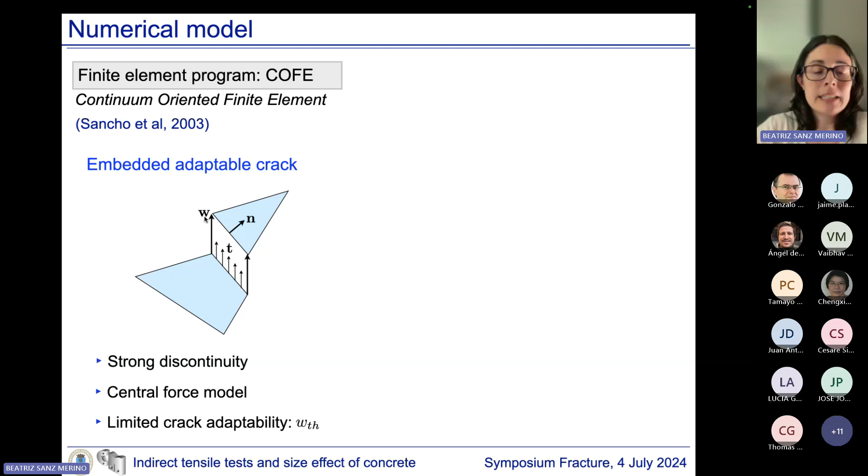It follows the central force model. It means that the traction vector and the displacement vector are parallel, and there is limited crack adaptability. It means that in the finite element program, the crack orientation is allowed to change until a threshold value WTH of the crack width is reached.

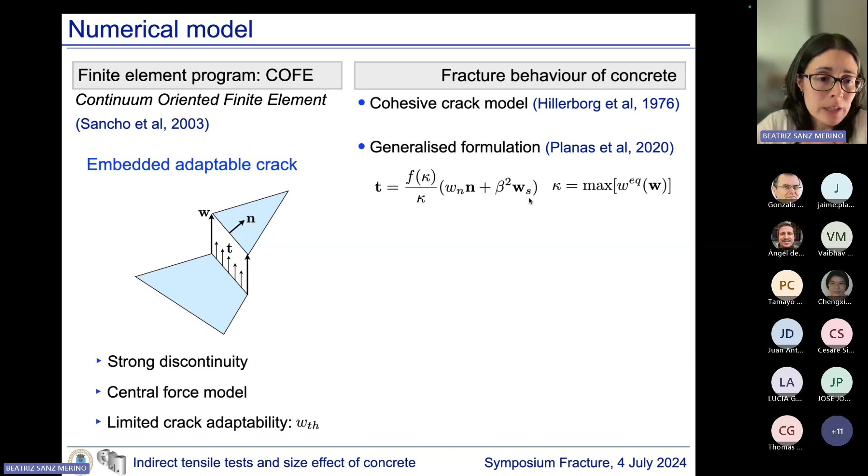For the fracture behavior of concrete in these simulations, we follow the cohesive crack model introduced by Hillerborg in 1976, as already explained, and a recent generalized formulation by Planas and collaborators was applied, in which indeed the traction vector can be modified and not be parallel to the displacement vector, but it was implemented just for comparison with other methods found in the literature. But for our simulations, we follow the central force model and values for beta equal to 1.

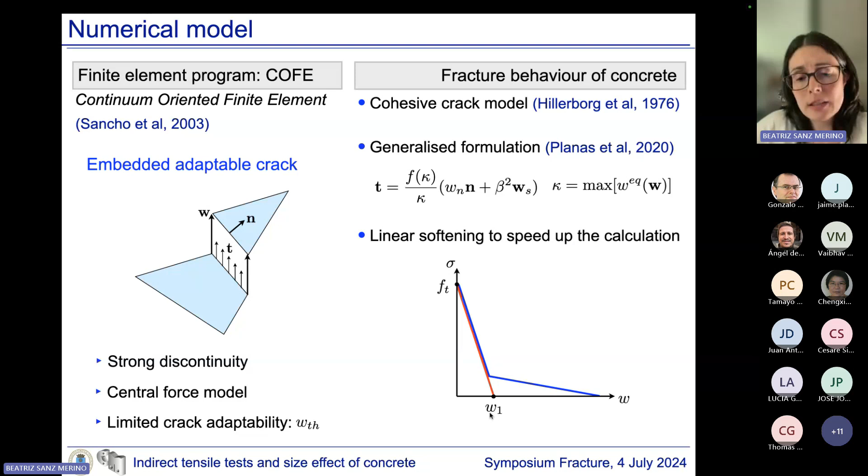In the calculations, just linear softening was taken into account to speed up the calculation, and because in the study we are just focusing on the maximum of the Brazilian test, and it is supposed to happen for crack openings smaller than W1. So these are the parameters in the simulations.

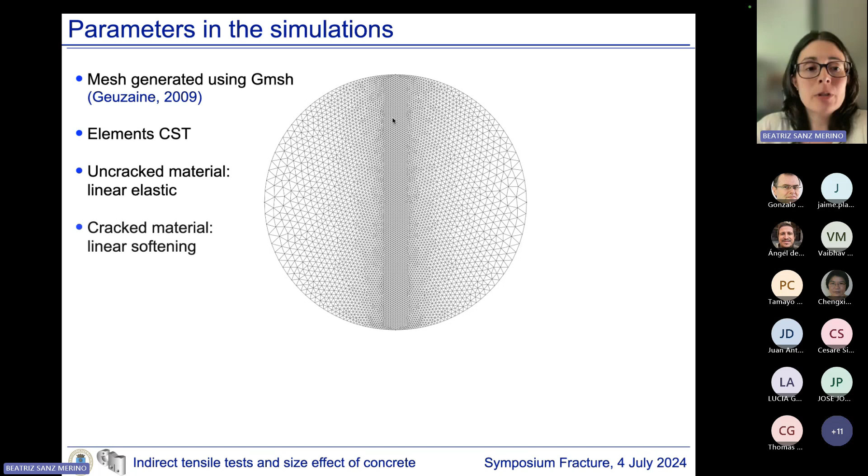The mesh is generated using the Gmsh program. You can see that here in all the domain we have elements which are constant strain triangles, all of them crackable elements. So the crack doesn't have a prefixed path, at least in this step. So the crack can appear wherever. For the uncracked material, we assume linear elastic behavior, and for the cracked material, the linear softening I mentioned.

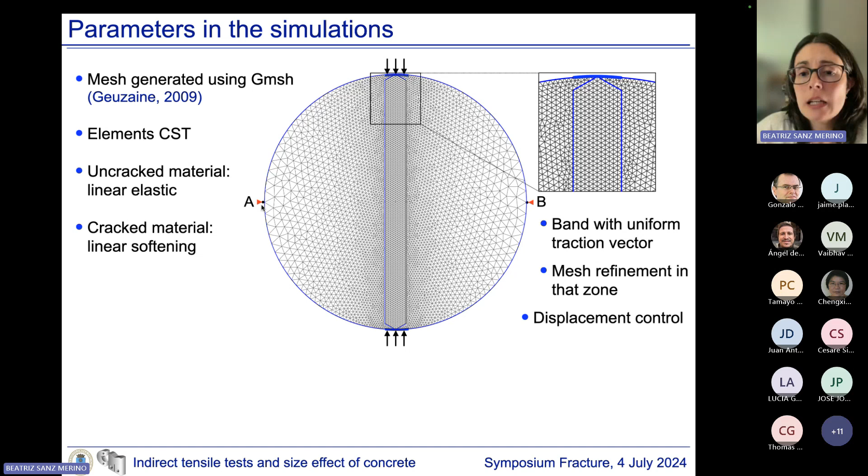Then we apply a band with uniform traction vector, simulating the load in the experiments, and there is a mesh refinement in that zone just to capture much better the crack path. And finally, the simulations were carried out under displacement control of the points labeled here as A and B. These simulations were dimensionless.

It means that all the displacements, stresses, and geometry parameters were divided by characteristic parameters of the structure. For example, all the stresses are divided by the tensile strength, all the displacements by the characteristic opening W1, and the geometry parameters by the diameter of the specimen. Then from the calculation, there is a dimensionless elastic modulus, which results to be proportional to the characteristic length, which was defined previously.

So for the size effect study in this work, there are several options. In the results presented here, we adopted the solution of modifying the fictitious elastic modulus of the simulations. So for a smaller elastic modulus, there is a higher ratio D/l1, which implies that the specimen is more brittle. And we covered the ranges studied by Claudio Rocco from 0.4

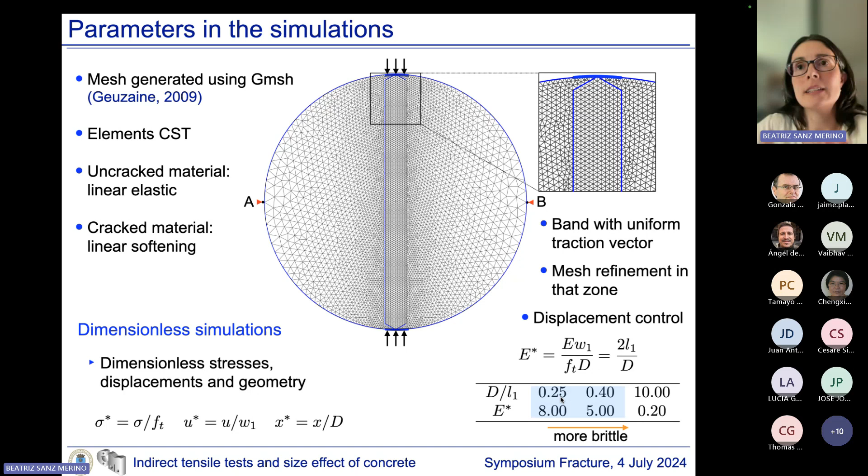to 10, just for verification of the method, because as Professor Planas also mentioned in his presentation, the conditions in the simulations were a little bit different according to the available methods in the 90s, and just after verifying that the curves are almost the same, we enlarged the curves for ratios up to 0.25, which is supposed to cover the current mixtures.

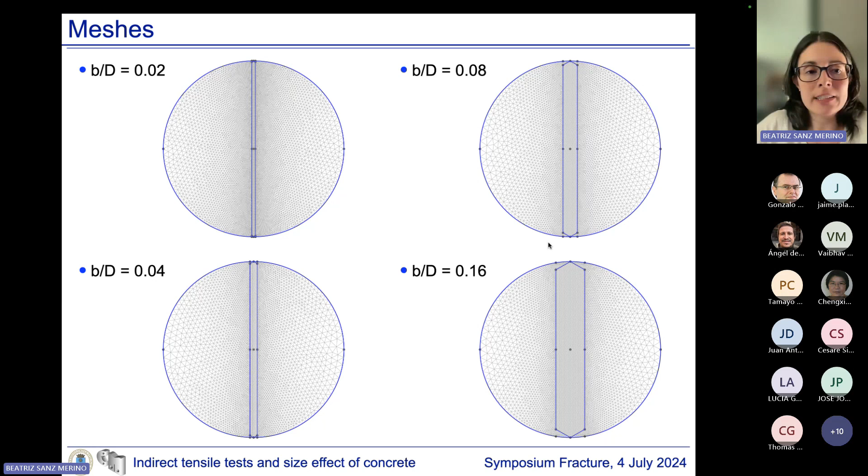These are the meshes used because we considered 4 ratios of bearing bandwidth versus specimen diameter according to the work developed by Rocco. And sorry, I didn't mention that the element size was kept almost the same in this band. But the number of elements of the meshes is not exactly the same, so we will improve that in the future, as I will comment in the conclusions.

So now I will present very briefly the results. Let me show here just the results of one of the specimens, because there are many simulations for several ratios D/l1, also ratios of the bearing bandwidth versus diameter. So here a representative example has been selected, and we can see in the simulation that the crack propagates from the center and then reaches the boundaries, and here there is the ratio between the maximum crack opening versus the characteristic opening W1 at the end of the computations.

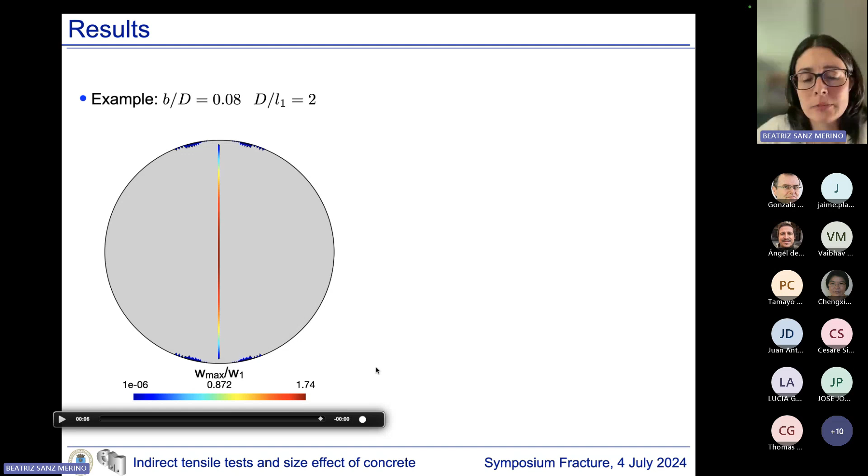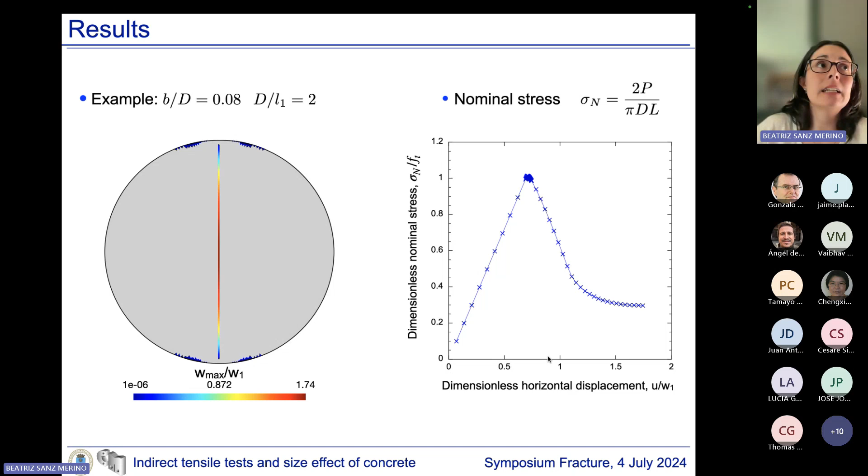So this is the curve of dimensionless nominal stress versus dimensionless horizontal displacement. There is a refinement of the steps just to capture accurately the maximum, and the nominal stress has been computed according to this formula used in the Brazilian test to calculate the tensile strength. So we verified that the maximum occurs for a crack opening smaller than W1. So the hypothesis of using the linear curve seems to be adequate.

And now I show here the size effect curves enlarged for the several ratios under study of bearing bandwidth versus diameter. And the main important result is that there is a significant difference between the tensile strength inferred from the splitting test and the true tensile strength for ratios below 0.4.

So this enlargement of the curves is important to determine the precision of the method and for the correction of the values of FTS, as explained, because these values are very normal for the current mixtures of high strength or ultra high performance concrete. In particular, for the mixtures that originated this work, we would be here, and for ratios of bearing bandwidth of 4%, the error in the determination of the tensile strength would be around 5%, and 12 to 13% for bands of 8% of the diameter.

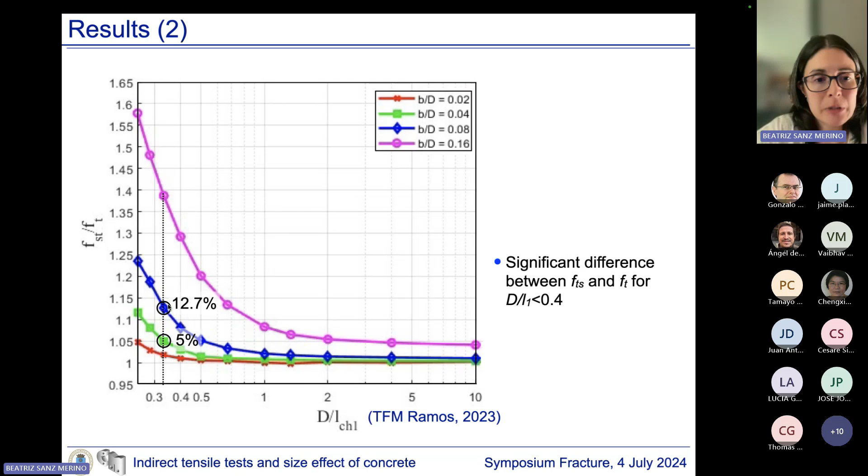So it seems that maybe for the new mixtures, the conditions of the Brazilian test should be reviewed, because maybe this bandwidth is not admissible, but if they have to be used for any reason, because otherwise the test is very difficult to perform, then this error should be taken into account and the tensile strength obtained corrected by using the iterative methods that I mentioned. And for this, analytical expressions of this curve will be provided in the future. We didn't include them in this presentation, but we are working on that.

So just to conclude, I will say that indirect tests are commonly used to determine the tensile strength of concrete, as they are very easy to perform. The size effect cannot be ignored and should be taken, sorry for the misprint, into account for interpreting the results and for designing appropriate tests.

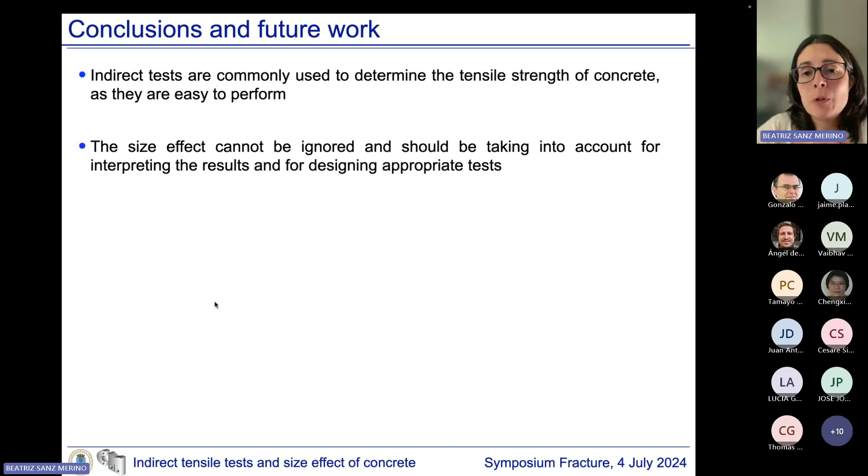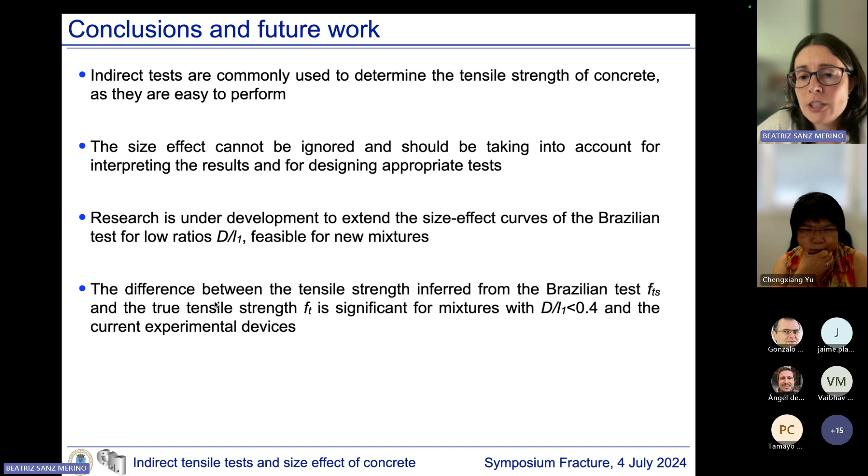Research is under development to extend the size effect curves of the Brazilian test for low ratios D/l1 feasible for the new mixtures, and the difference between the tensile strength inferred from the Brazilian test FTS and the true tensile strength FT is significant for mixtures with ratio DL1 below 0.4, and the current experimental